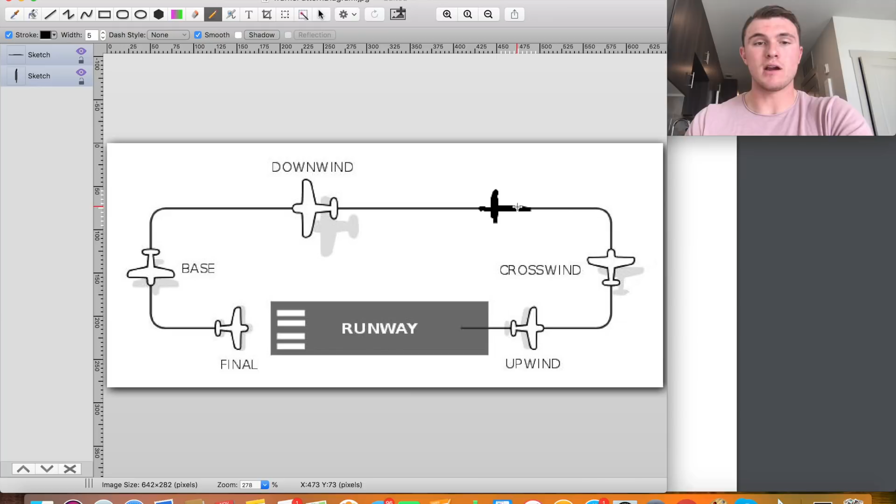We are crosswind to downwind as we hear an airplane about 3 miles out from the runway coming in to enter the pattern. Now, there's one more aircraft in the pattern. We'll represent them by a blue. Since they're more of our friend, we'll do red for the guy that cut us off. So they are in the downwind, pretty much represented by this airplane here. So we have two airplanes in the pattern, this bluish purple color, and then we have us, the black airplane.

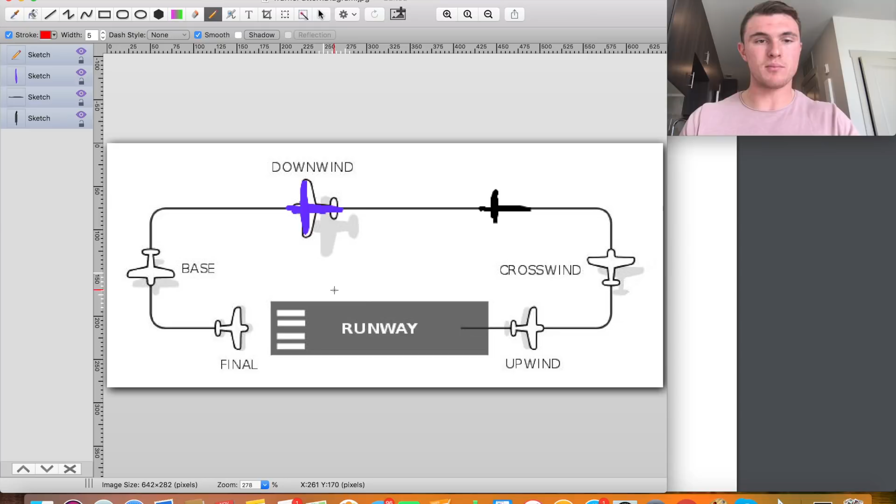So we're cruising along, we're crosswind to downwind as a third airplane makes a call in 3 miles to, in this case, we'll say the south of the airport, coming in from this direction to cross over the top and enter the downwind. So we make a crosswind call, we make another call turning downwind, and this airplane, they make a call saying that they will enter the downwind behind the aircraft. They only refer to one airplane, in this case being the front airplane.

So we make a call and say, are you going to enter the downwind behind the first airplane or the second airplane? Just announcing and making them realize the fact that there are two airplanes in the pattern. There's not just one, and we want them to enter properly because we're kind of confused. I'm with a student pilot. Thankfully, this guy owns a flight school. He was an experienced pilot in this circumstance. We both knew what we were doing, CFI, and someone who owns a flight school when this situation occurred.

So he decides to clarify to us, yeah, we're going to come in between you guys. You're still pretty far out. Now, in this case, we had perfect spacing with the airplane ahead of us, and we weren't too far out. So I'm just watching, kind of waiting for this guy to come into my view to see what happens. He knows that I'm there, and I'm seeing where he is to make my call on what to do. The student in this case in the left seat is still flying the pattern. We're practicing patterns for his private pilot check ride.

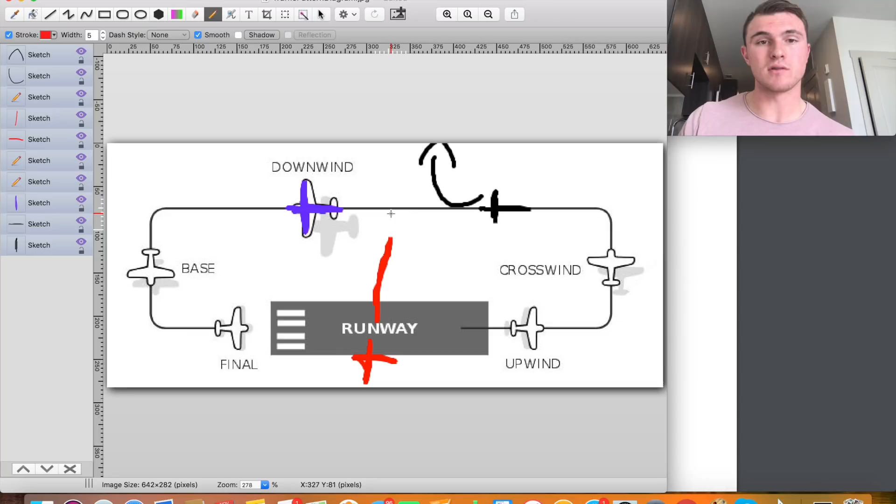So he comes in. This guy ends up coming in front of us, and eventually I see him very close. He comes in between the two airplanes, and I say, you know, you're crowding us, you're getting really close, and eventually we have to make an evasive maneuver. And I go ahead, take control of the airplane, and pull the plane off to the right here to avoid colliding with him, because he does a pretty square turn coming in here and just squares his turn at traffic pattern altitude across the runway, square into the downwind, and ends up cutting us off.

So he cuts us off. I say, hey, you cut us off pretty bad there. He gets pretty upset over the radios, and then he ends up crowding this guy, the front airplane, who defends me over the radios on the CTAF frequency and says, yeah, you cut him off pretty bad. I saw the whole thing. And now you're crowding me.

This guy ends up landing on the runway and makes a call back because the red airplane, the cutoff guy, ends up crowding him and almost lands on top of him. And then we have to extend our downwind to base because we almost come in on top of the guy that cuts us off. So a typical situation that might happen in an uncontrolled pattern,

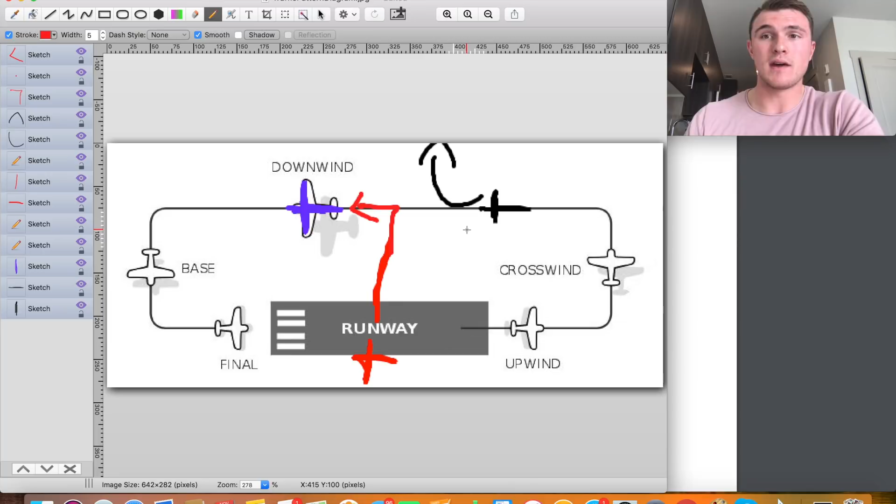and something that could be prevented. So we'll talk about the proper way to enter an uncontrolled pattern, because a lot of people think it's the right way to enter a pattern to come across the runway at traffic pattern altitude and then just come in and join the downwind, which isn't a problem if there's nobody in the pattern or there's one guy that you're communicating with or it works out. But there's a much, much better way that I think some people don't teach, so we'll go over that.

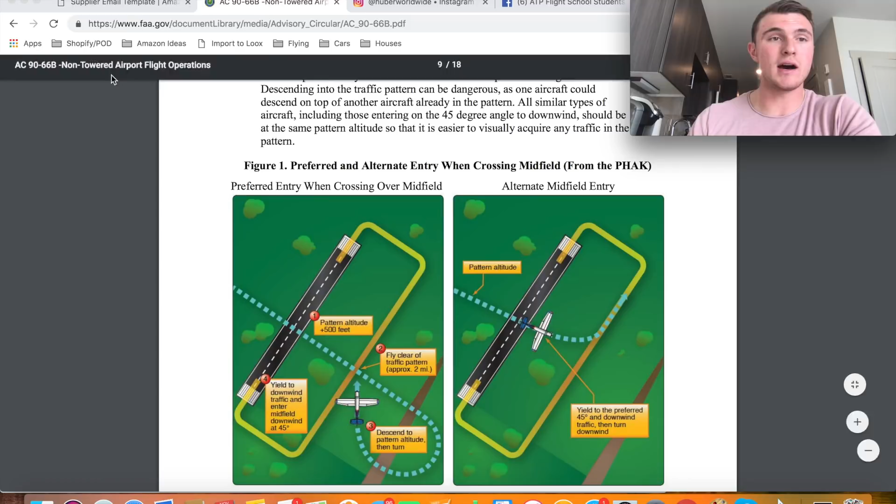Okay, so here I have pulled up Advisory Circular 90-66B, which talks about non-towered airport flight operations. And if you go down to page 9, it talks about the preferred and alternate entry when crossing midfield. Straight out of the PHAK, the Pilot's Handbook of Aeronautical Knowledge, chapter 14.

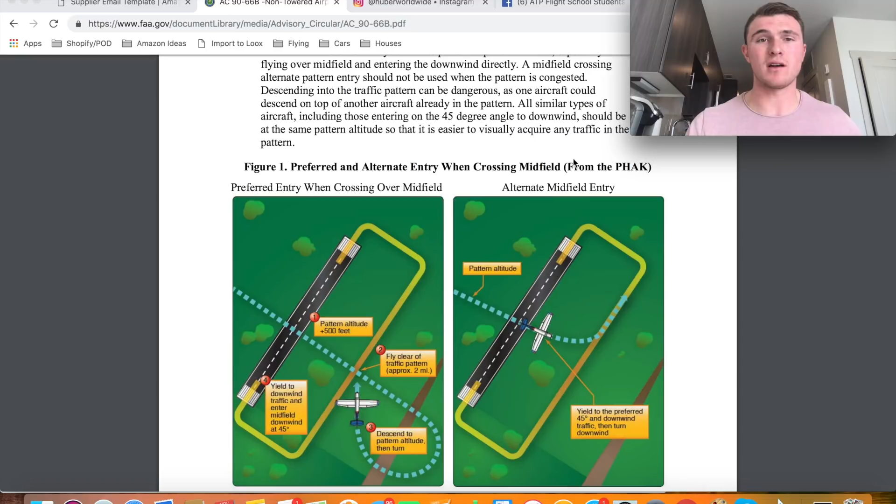So here, the alternate midfield entry, this is what our friend or foe did in the pattern when he came in. So he came in at pattern altitude, middle of the downwind, which isn't a problem if there's only one airplane, maybe on base or on downwind, abeam the numbers that he's following in. If there was just that one airplane in the pattern, that would have been perfectly fine. But we were in the pattern, crosswind to downwind, and basically midfield downwind as he cut us off, came right in front of us, and we had to pull out to the right and get out of the way.

So what he should have done, being that there were two airplanes in the pattern, he should have done the preferred entry crossing over midfield. Also called, or at least my flight instructor called it, the teardrop entry into the pattern at a non-controlled field. Now I know a teardrop entry is technically a procedure for holding patterns or procedure turns in instruments, so that might not be the technical terminology, but we'll go with that. You could call it the 270 entry or just the preferred entry when crossing over midfield, as they go over in the PHAK. And this entry is to make your standard calls.

Normally I teach you make a 10-mile call, a 5-mile call, and a 3-mile call coming into an uncontrolled airport so that everybody on frequency is well aware of what we're doing. And then if there are airplanes in the pattern, this is what I teach and what the PHAK recommends that you do. You should come over the pattern at pattern altitude plus 500 feet. That way you're over the pattern. Anybody in the pattern, you're not going to cause any conflict with them. So regardless of how many people are in the pattern, come in over the pattern at 500 feet,